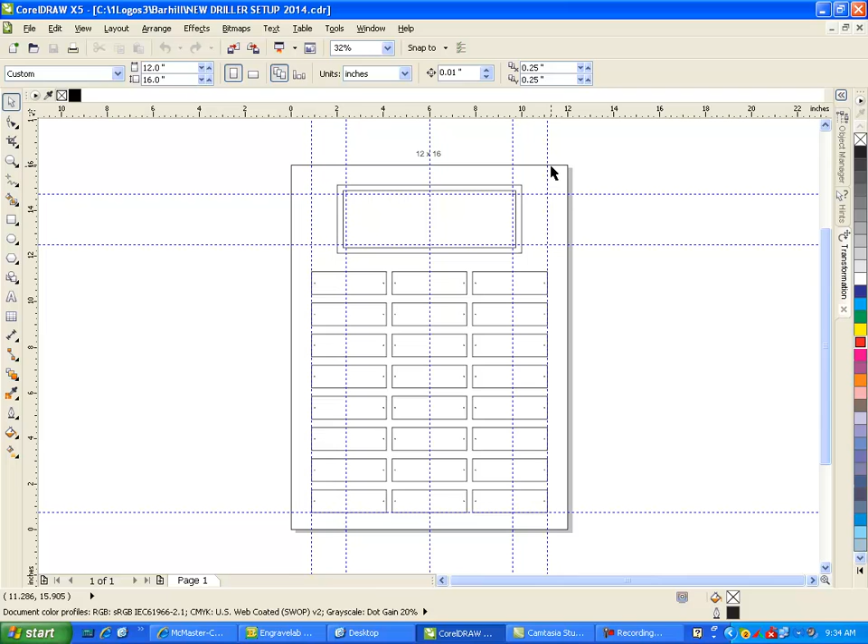So what I'm going to do is just take everything here. And I can see it's nice. He did put a border around here, and you can see that this is 12 by 16. But I can see that it does have an outline of 2 points. So we'll worry about that later. I'll go Control C to copy it.

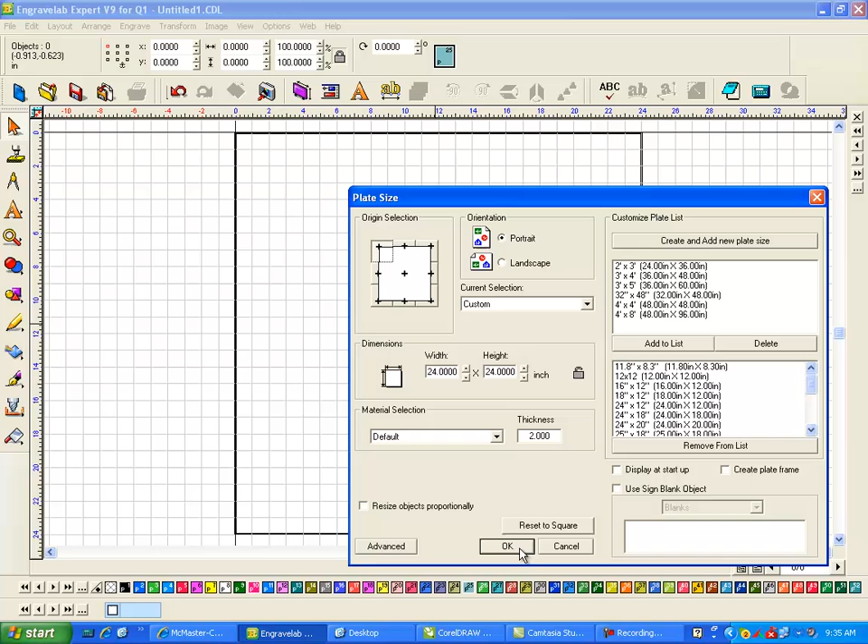I've already got EngraveLab open, and I'm going to hit F8. I have it set up as a 24 by 24, and the home position right here is at 0, 0. I can go to plate size, and I have this checked off, and that's already been done. So I go edit and paste, or I could hit Control V.

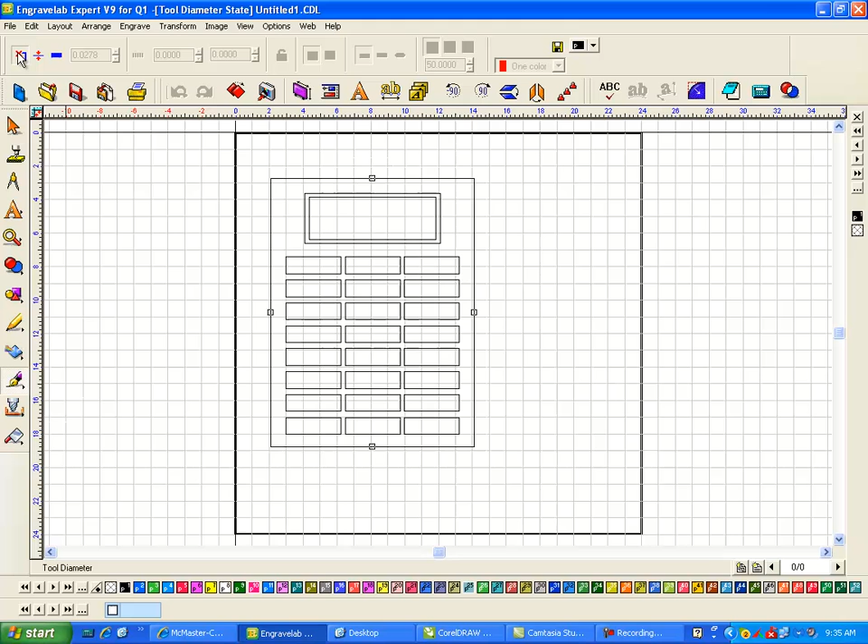So here's my import, and I'm going to just delete this portion of it, and you will see that the size is bigger than 12 by 16. So with it all selected, I'm going to go over here to the strokes and lines, and then click on this little icon, come up here and delete those so there is no line, and now you'll see that it is exactly 12 by 16.

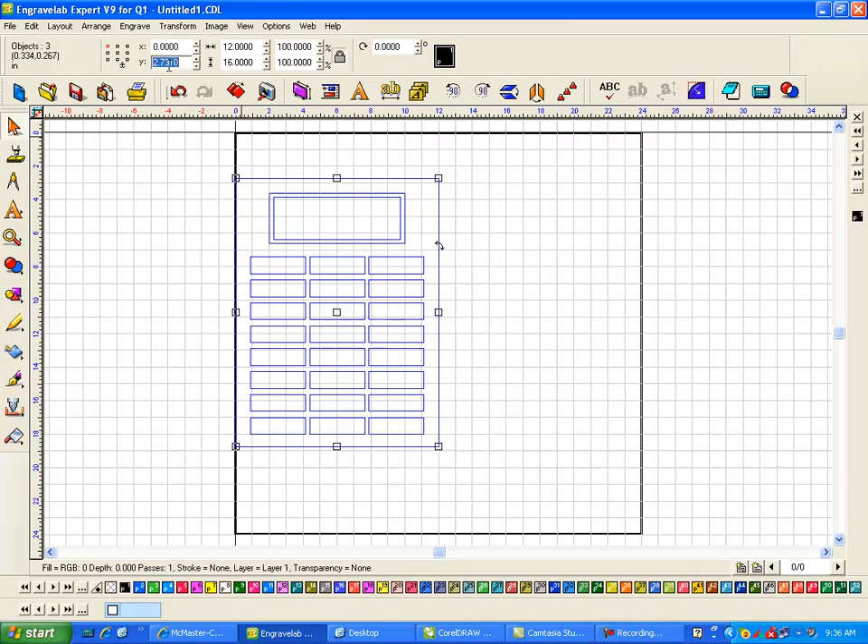Sometimes it comes in as a funny color, so I'm going to assign it layer 1 or P1. So now everything here is P1, and I usually like putting it up in the upper left hand corner, which is going to be the engraving corner. Now I know that within this sign are holes, and I can see that much of this is grouped, so I'm going to just select everything and go under layout, ungroup all.

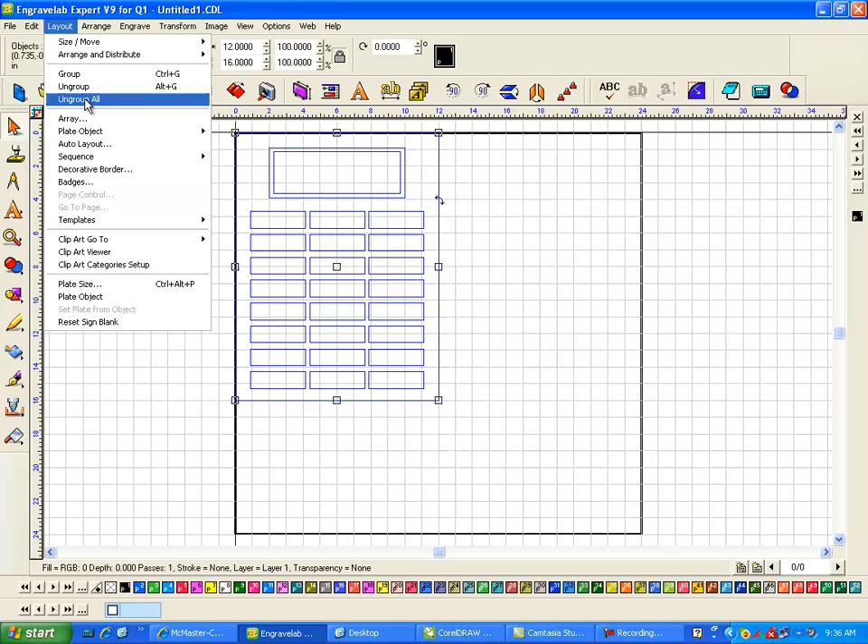Okay, so now everything is ungrouped, and I know that there's holes here. Actually, I could zoom in just to show you. Okay, so there's your holes, and I am going to give it a color, P13. Go to F8. Now I'm going to select the holes right here, and also give them a color P13, and this one here, P13. This could have also been done in CorelDRAW. Now I also know that there's 4 corner holes, so P13 and P13.

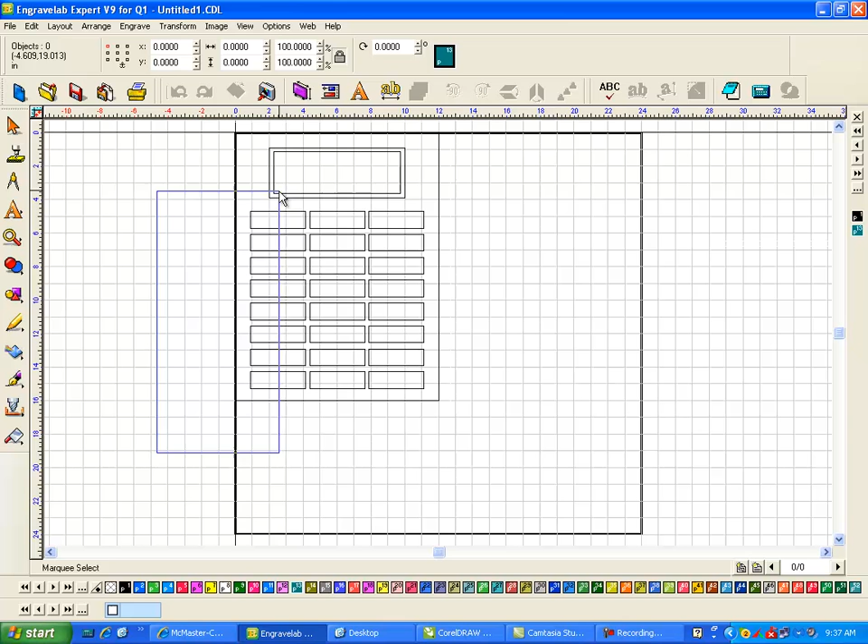Okay, so obviously I don't want to engrave this. I want to drill holes. So I'm going to hold the Alt key down and just click on P13. So if I go right here, it has selected all of those holes. Now something right here did not get selected. So let's see what I did wrong. I'm going to select right here, go to P13, and now hold the Alt key down, P13, and now it should have gone all the way out to here.

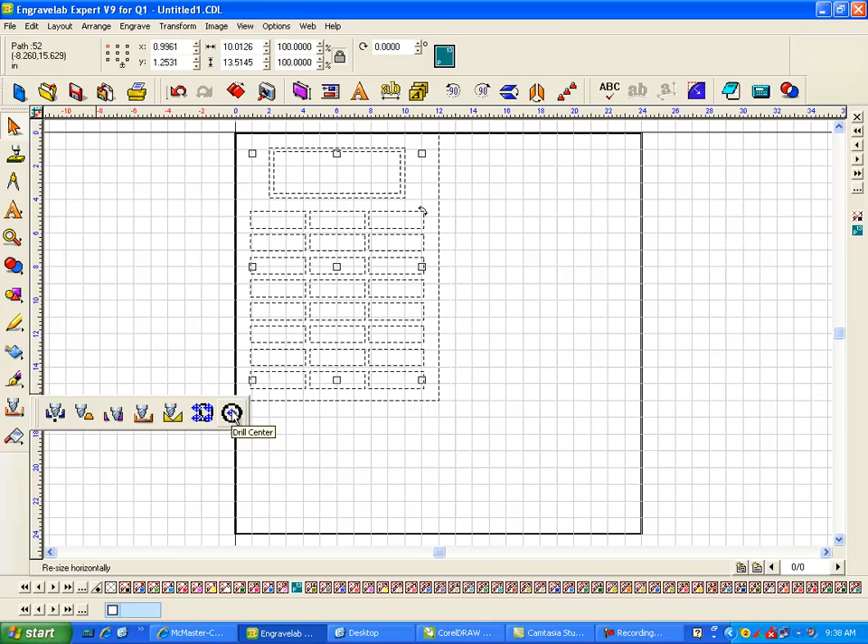So now I've got a little icon right here. This is a drill tool path, and this is a drill center. Now I have only P13 selected, so that's why this is crosshatched, but we'll just leave it. It's P25. And since you're drilling, it really doesn't matter what you pick here, but the size of this tool will be the size of the depiction on the screen. So if you make this real tiny, you won't see it. I'm going to make it 1/8 of an inch, so it's very big.

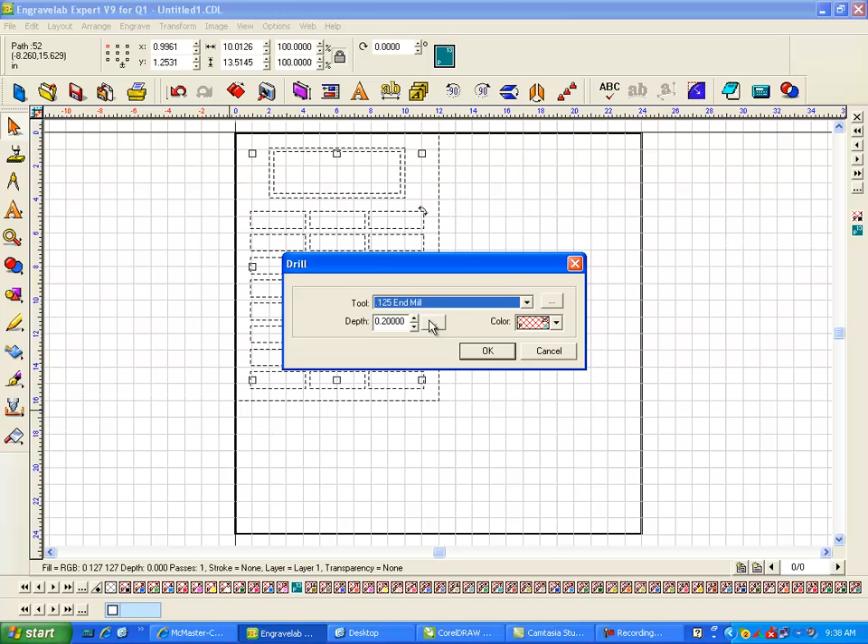Now I need to pick the depth that I want to go. Maybe I want to go 0.2 inches deep, and I want to do it in 3 passes, and then say OK.

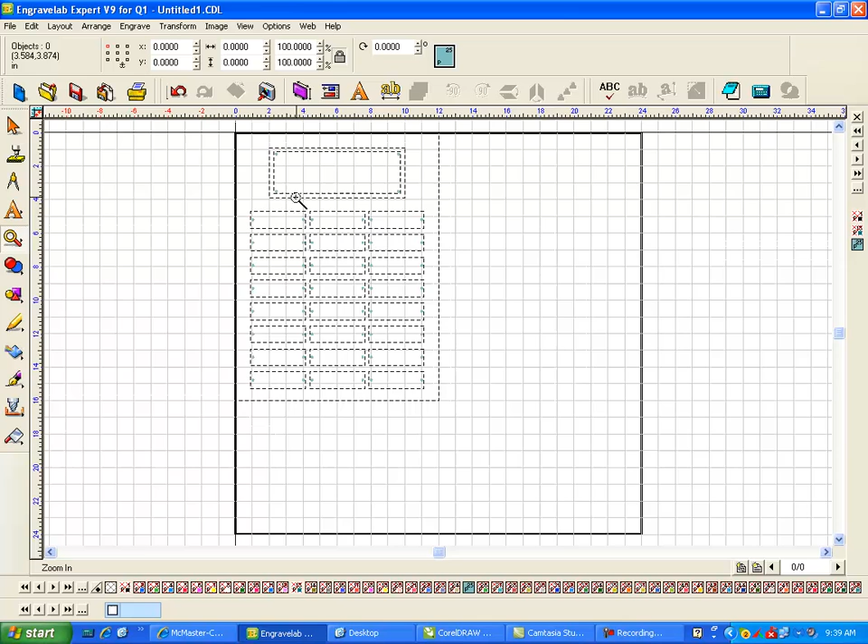And then say OK. And now you see I don't have P25 visible, but if I hold the Alt key and hit P25 2 times, here is my depiction of those drill holes. Now this is ready to just select, engrave, and output, and P25 and select, and there it is, ready to engrave.

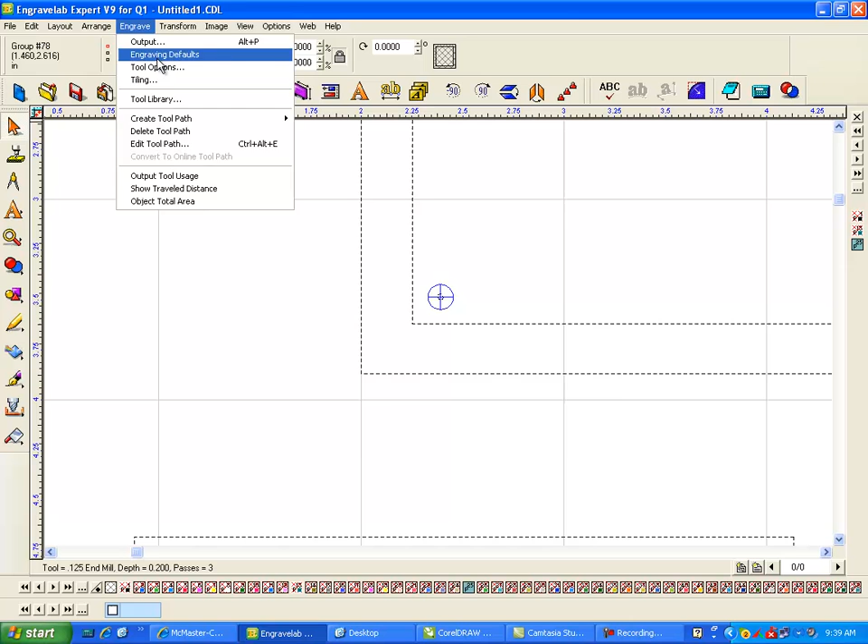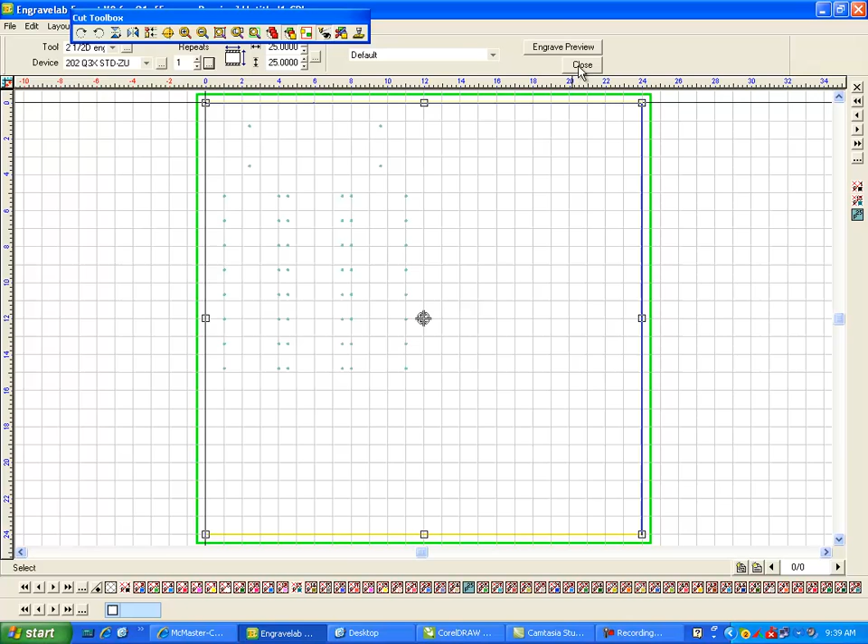Now I need to change something. Engraving defaults, setup. I got to change this to a 25 by 25 engraver. That's why it didn't come in. Apply and close. Engrave output. Select. And now here's my, in green is my table size, and this is basically what it's going to engrave.

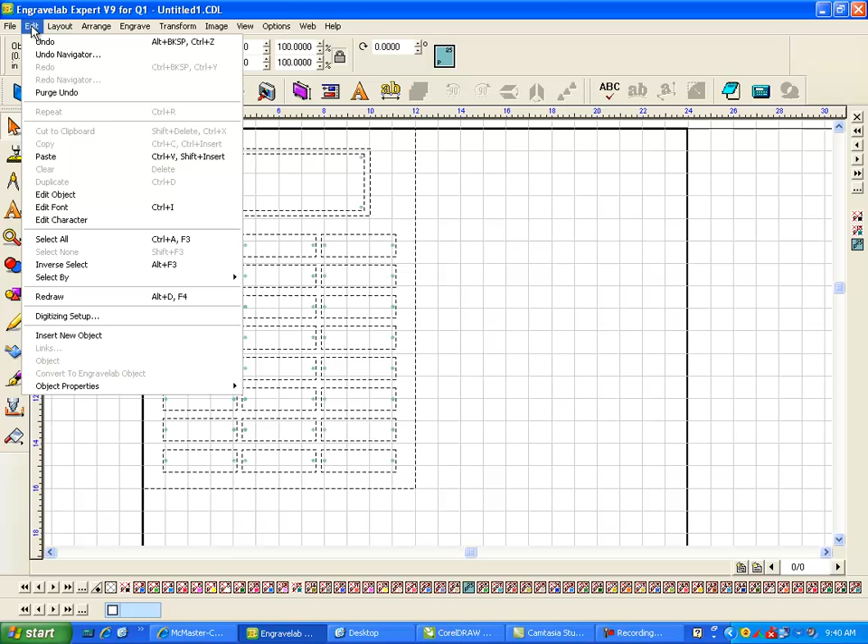Now, because it's grouped, I don't know exactly how it's going to engrave, what order it's going to engrave in. I may want to change that, so I'm going to just click here, go to Arrange, and go to Ungroup, which is Alt-G. And I have a hotkey for it. It's Control-Alt-L, but I'm going to use the non-hotkey, which is sometimes hard for me to find.

Engrave, layout, sequence, by list. And I only want the sign blank, and I only want toolpath. So here's my toolpath. And it might be a little hard to see, but you'll see a little red dot right there. And it says hold the shift key. If I hold the shift key and arrow down, you'll see the red dot going across the page.

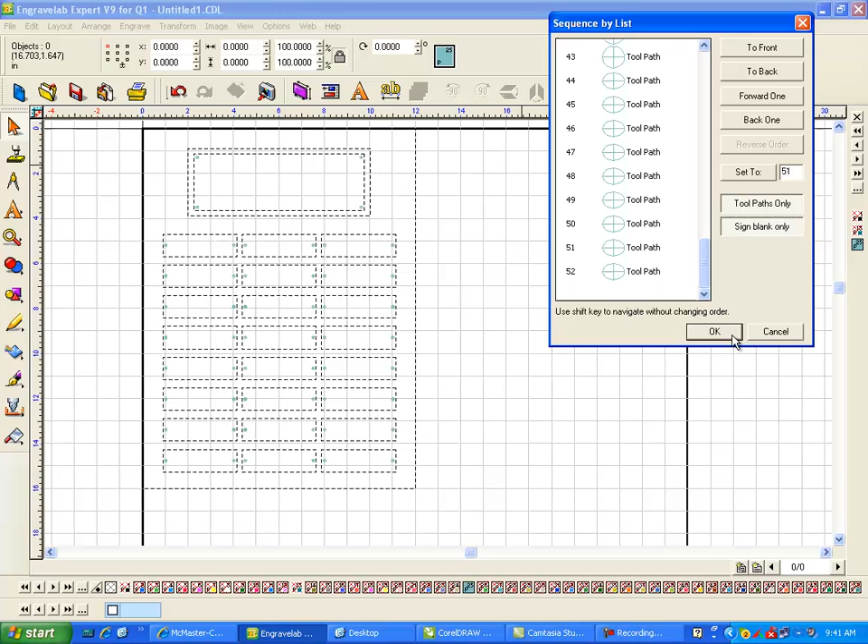And if this were something that I was doing thousands of, I would change the order that these would engrave. And actually, maybe I'll just go ahead and do that just to show you how powerful it is. And here's the final 4, and here's the last engraving it's going to do. So for my money, I want this one to the top.

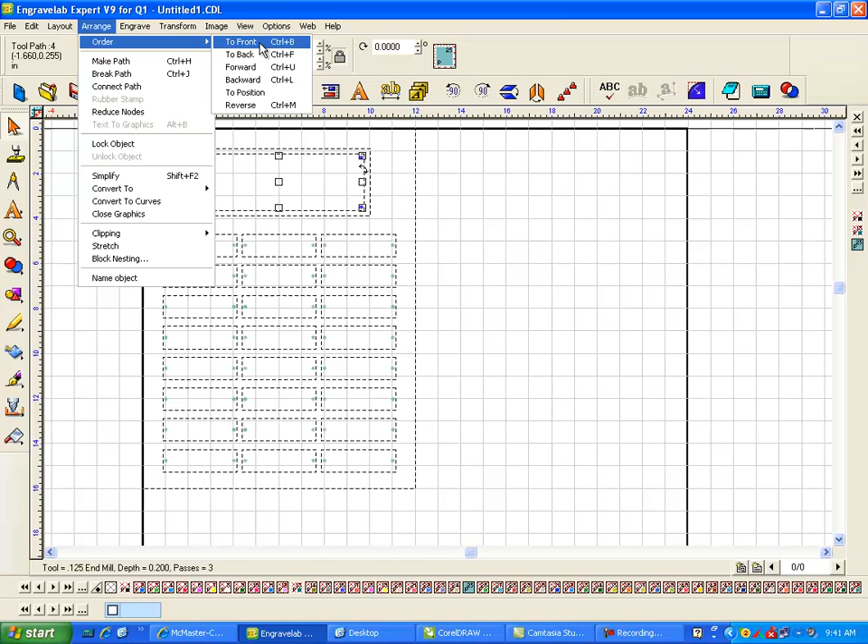So I'm going to go to arrange order, and the order for CADlink is backwards for engraving, so I've changed back to the front and front to the back. So I want to send this to the front, so I hit Control F. Now this will now be the first thing it engraves, but it goes here, then it slides across.

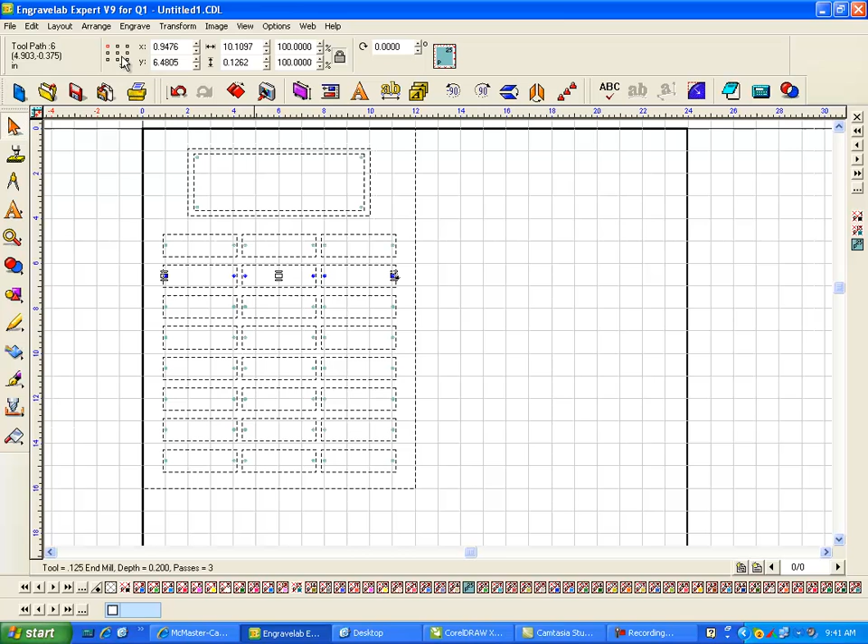So because this is probably symmetric, and I can tell by going to the center point, well, it's about 2 thousandths off. So I'm going to go back to my full drawing, and let's see how close this is. So this is at exactly 6, and all I'm going to do is just mirror this. Then I'm going to go to the next one and mirror this one also, and you'll see what that does here in a moment. Mirror this one, and of course it looks exactly the same, because when you mirror something that's proportional.

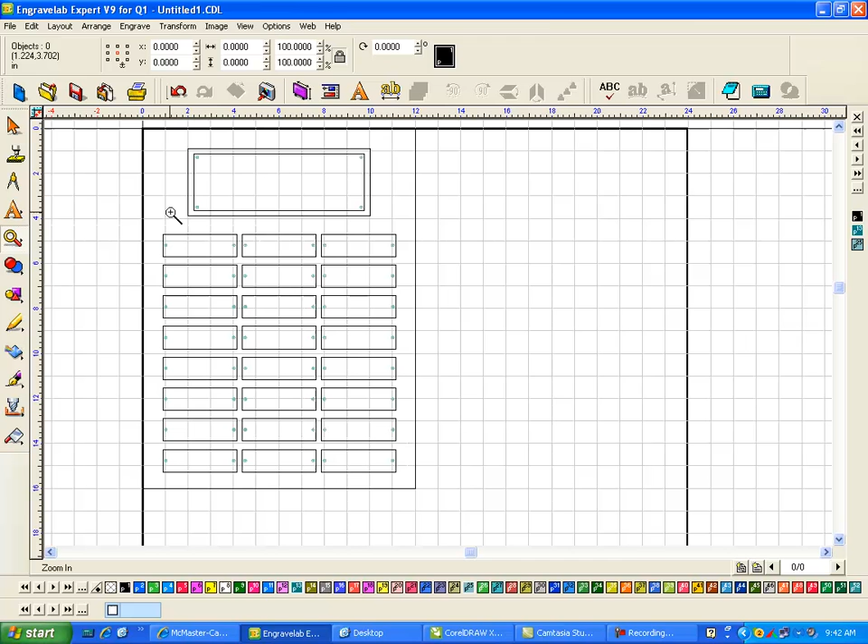So now let's go Control-Alt-L, and I only want the tool path. So now it's starting at this lower left corner here, and as I go shift down, goes around there, starts to the left, 2, 3, 4, 5, and now you can see it goes in a much more efficient order than what had been previously. So I'm just going to go through all of it to check to make sure that it's okay. And that's where it's going to end.

Now I'm going to go up to the top, and I'm going to fix this one. I know this is where I want it to end. So if I click this point, I want it to start here. So I'm going to move, and then this. So I'm going to take this one, and this one, and to front. So now here's my first hole.

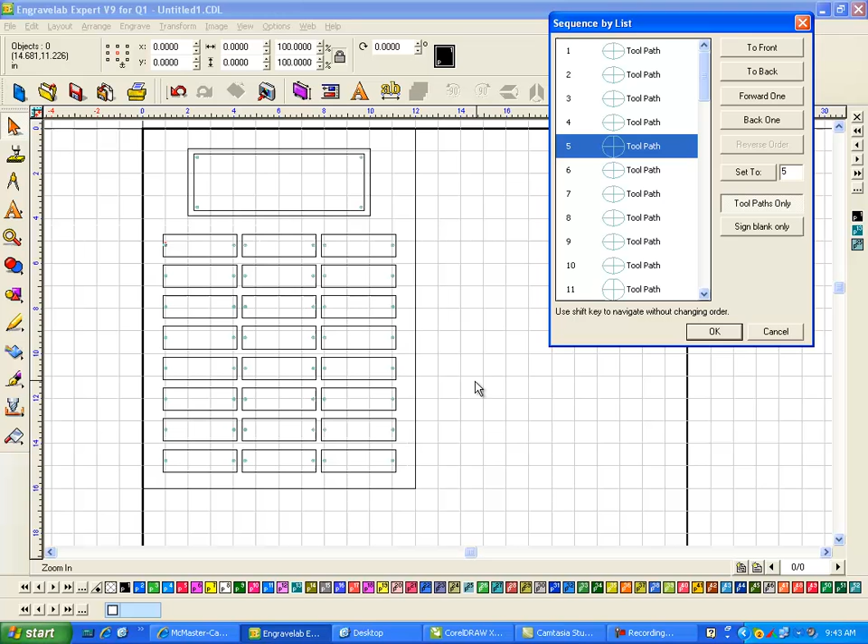Oops. First hole, hold the shift key. It's supposed to do it. Shift, down arrow. 1, 2, 3, 4, and then so it doesn't do a long path around. So it's going to start here, go around here, go across, and so forth. And then I just say OK.

And now is a real good time to save it and give it the name that you would want here. I know that I put it in Bar Hill, so this is Bar Hill 12x16 plaque. Hope I spelled that right. No.